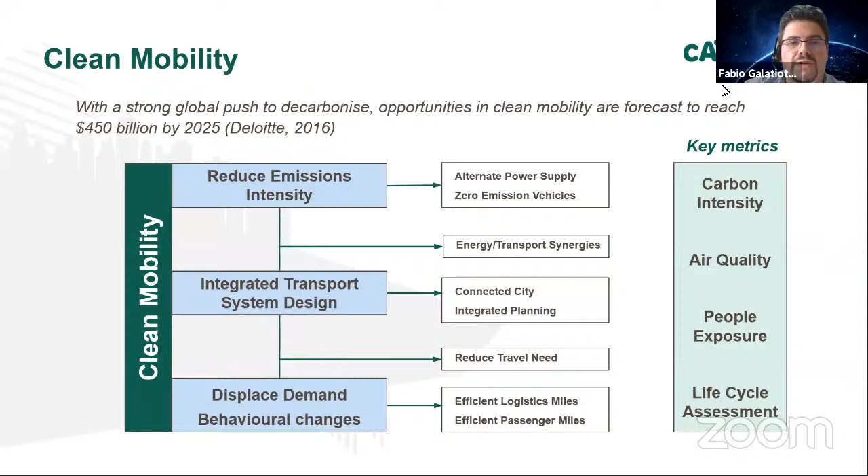Another important element that I want to address is the key metrics. I think all of the actions and strategies we will take in terms of air quality and clean mobility should be assessed by different factors - not just air quality, not just carbon intensity, but also people exposure, well-being, and life cycle assessment, which should play a big role in terms of sustainability, in the short, medium and long term, of all we do around clean mobility and decarbonization.

Just to be a bit more provocative, also thinking about the wider problem and how we can address it in the future. I think one key picture I've seen on the web tells a lot in terms of how we can act today, but also in the future, is how WHO guidelines and EU limits, or the limits we are implementing in air quality today, have some similarity, especially in NO2, but there are several differences in other pollutants.

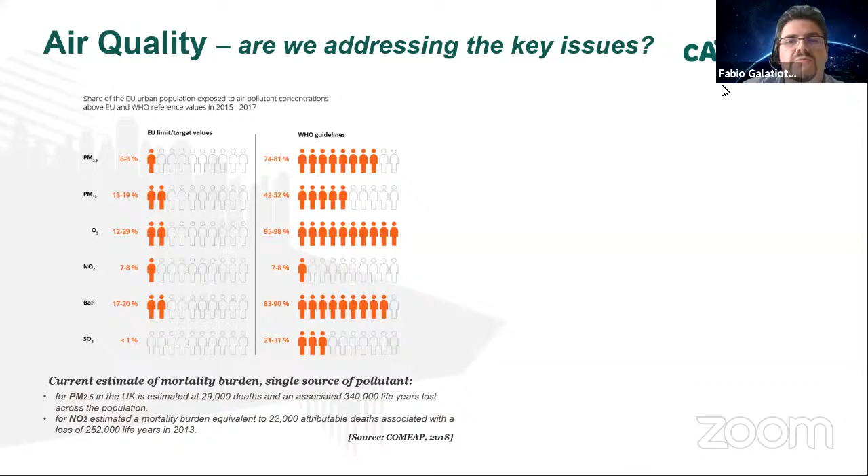In particular, if we look at PM, and assume the WHO guidelines as a reference, we will suddenly see that the UK issue isn't just about nitrogen dioxide and reducing NO2 pollution, which is the majority of air quality management areas today, but PM will also play a big factor. Especially recently in terms of deaths, there has been evidence that poor air quality, especially for PM, is actually driving a higher death rate for COVID and other diseases.

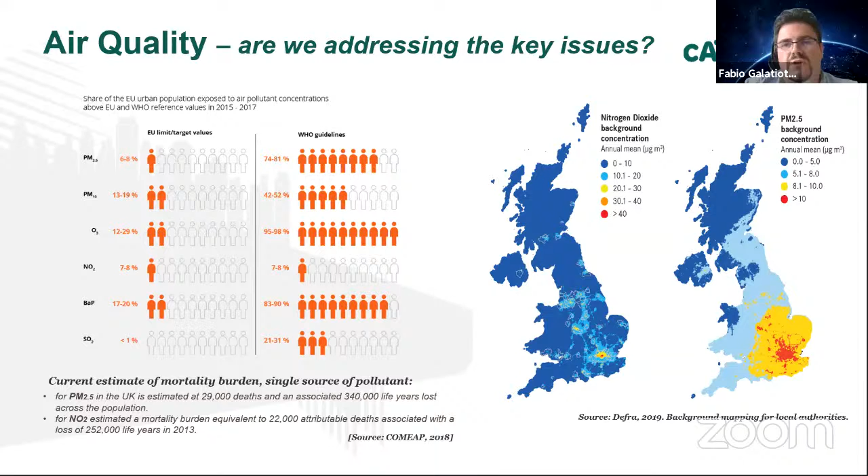At the same time, from the government and the Office for National Statistics, the first GDP result from April was minus 20%. However, that clearly says something to us and poses a few questions. How much transport does our economy actually need to run at a similar level as pre-lockdown? Because if we have 75% less traffic and we are only minus 20% economy, that means we can do a lot of the economy without running all the traffic we had before the lockdown.

So since we are starting to talk about a new normal, I think remote working, online shopping, and local trips will be prevailing, at least in the short term. That could be a good excuse for trying new strategies and policies, but it will also create other problems or shift the problems elsewhere.

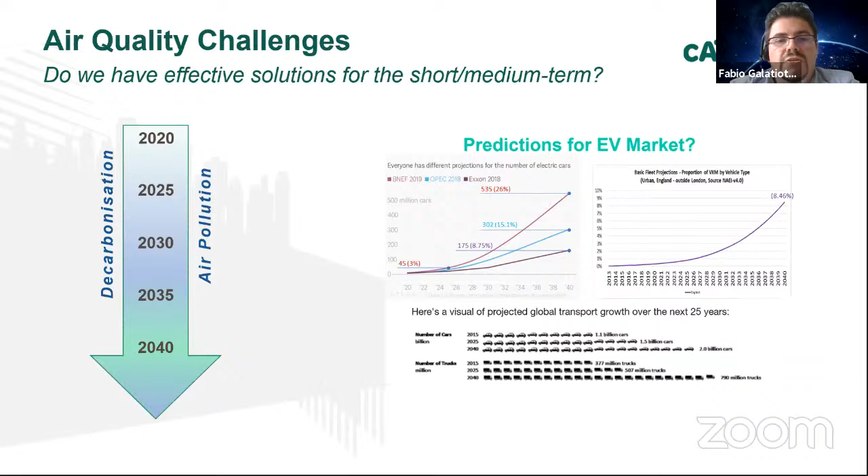But in order to achieve the targets we've all seen from the government, from high level, even the United Nations, the best scenarios tell us we can possibly get up to 26% electric vehicles at best. At the same time, so far we've been told we can grow and have a better economy if we have more vehicles around, more movements, and so on. All predictions say we'll probably get about 40% extra vehicles in the next 20 years, which overall seems not to be the solution, but actually one element of, or one approach to, the solution.

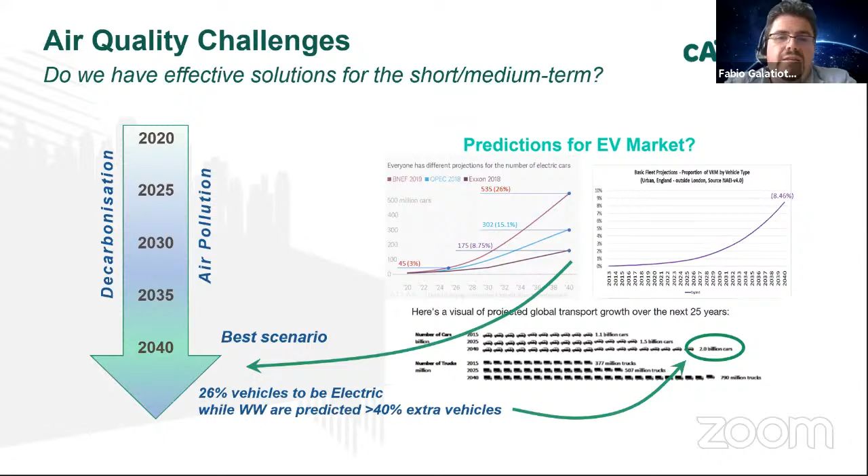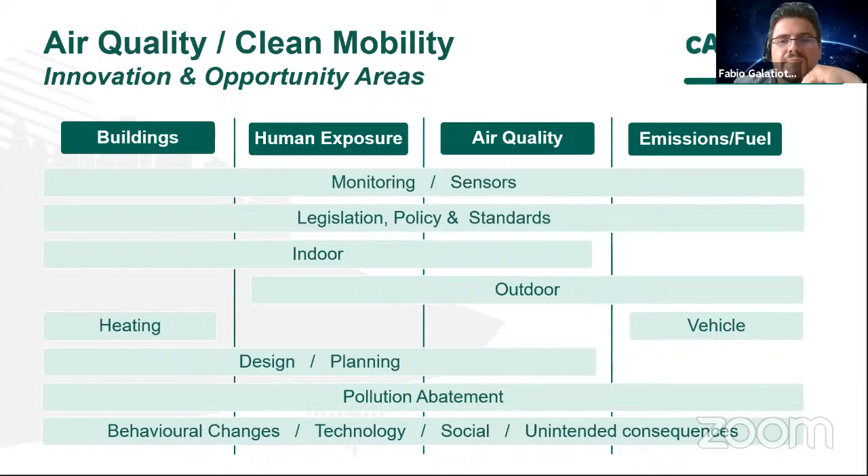So we need to do quite a lot more than just looking at the electric vehicle. I think there are areas that can be cross correlated, or can sometimes work in silos most of the time. But actually our role in the Catapult is to make these all work together. The last thing I want to mention is that indoor and outdoor air quality trade-offs will become more and more important. We spend 90% of our time indoors, and more now than ever after the pandemic. We need to be really careful about indoor air quality and how we treat the quality of the air. That's my presentation, thank you for listening.

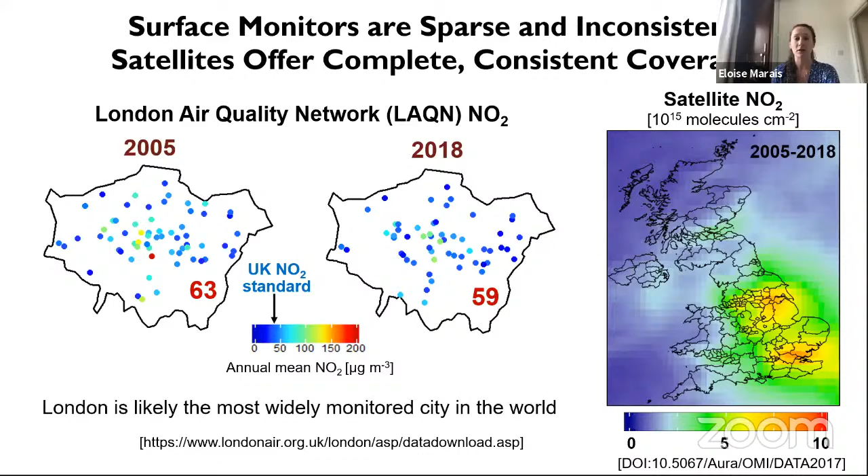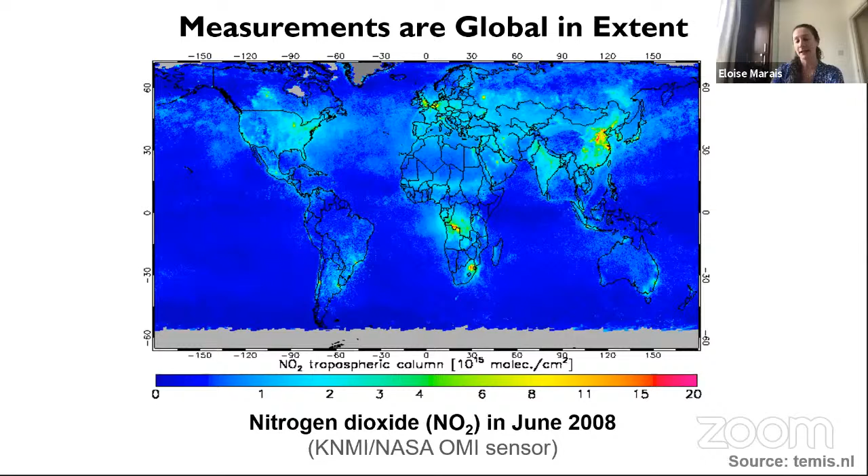The other important thing about satellite observations is that they don't just provide measurements of one pollutant, they provide measurements of multiple pollutants. My intention here is not to take you through a chemistry lesson—this is just to highlight the pollutants that can be seen from space, with these little icons showing satellites.

We can see things like SO2, which for the UK comes from burning coal and other energy-intensive industries. We can see an oxidation product of non-methane volatile organic compounds, which are precursors for the formation of the air pollutants ozone and PM2.5. We have very few to no measurements of NMVOCs, even in the UK, where we have relatively more than other parts of the world. We have measurements of NO2, as I've shown already, and then of ammonia, which is incredibly interesting, not directly regulated, and comes predominantly from agriculture.

And then, of course, we can't see PM2.5 directly, but we can see information that tells us about how PM2.5 is varying in the atmosphere.

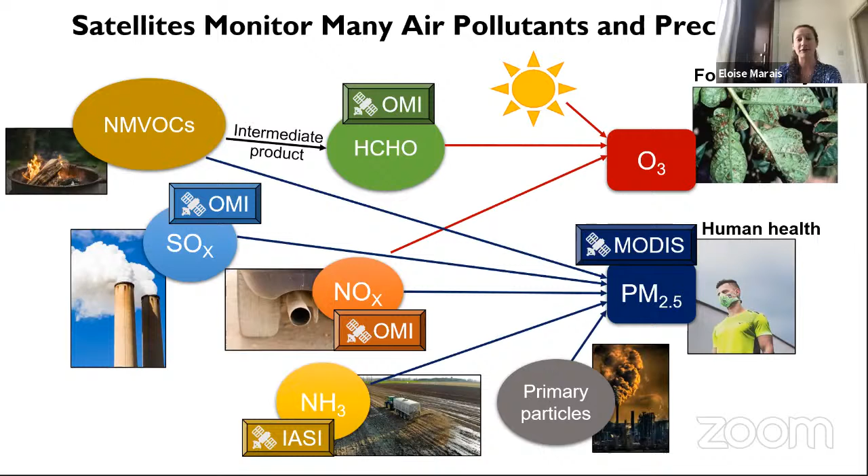Next slide, please. The other important thing about satellite observations is that they have a really long and well-sustained record. There's lots of acronyms here, and I don't mean to burden you with these—these are just the names given to the different instruments in space. I've highlighted the three that I make substantive use of to better understand changes in air pollution in cities: the Ozone Monitoring Instrument, or OMI, the Infrared Atmospheric Sounding Interferometer, IASI, and the Moderate Resolution Imaging Spectroradiometer, or MODIS. They tell us about different things in the atmosphere—OMI tells us about gas phase compounds, as does IASI, and MODIS tells us about PM2.5.

Some of these have been in space for more than 10 years, so you could start to build a historical record about how air pollution has changed in cities, to evaluate how policies have been effective or ineffective at reducing air pollution, as well as looking at how rapid development in cities in the absence of air quality policies leads to substantial and rapid degradation of air quality.

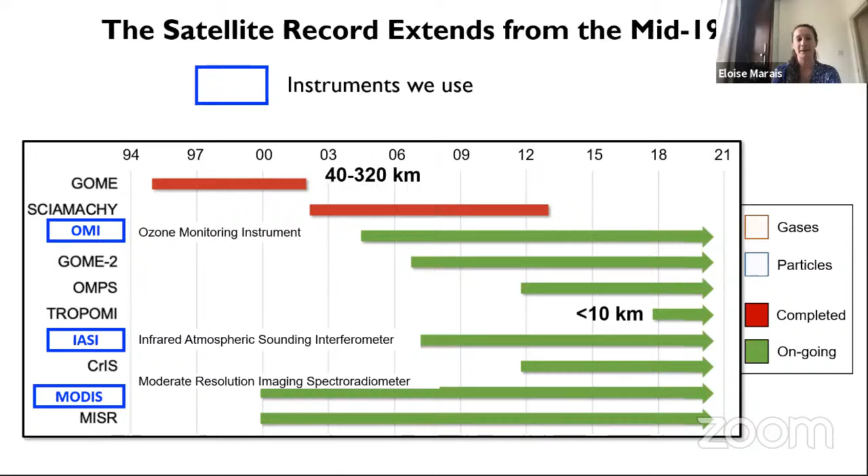Next slide, please. One issue I have to highlight is that these satellite observations are at coarse spatial resolution. This shows visually the extent of a single pixel or data point from these satellite observations relative to the size of London. For something like the OMI instrument, we only get about 4 or 5 pixels in London. For the MODIS instrument, we see a lot more, but it's still at 3 kilometer resolution.

So I'm not advocating for using these to understand postal code levels of air pollution. What I'm advocating for is the ability to use these to monitor citywide concentrations of air pollution every single month of the year for more than a decade, to understand how air pollution has evolved in a city like London.

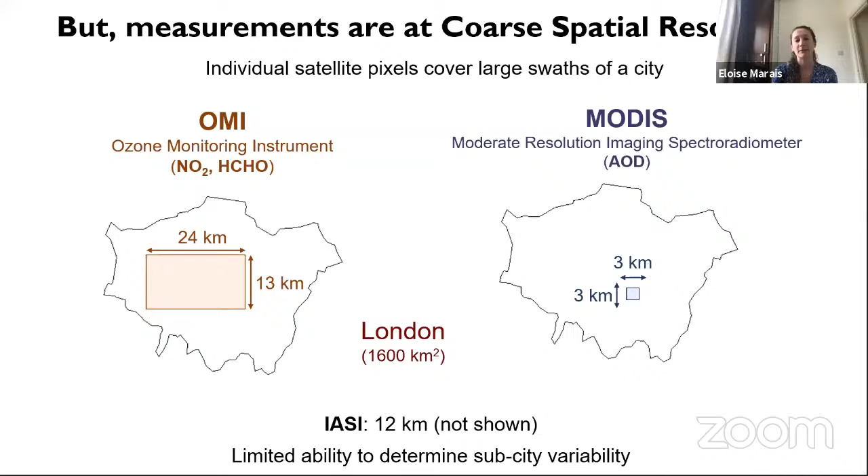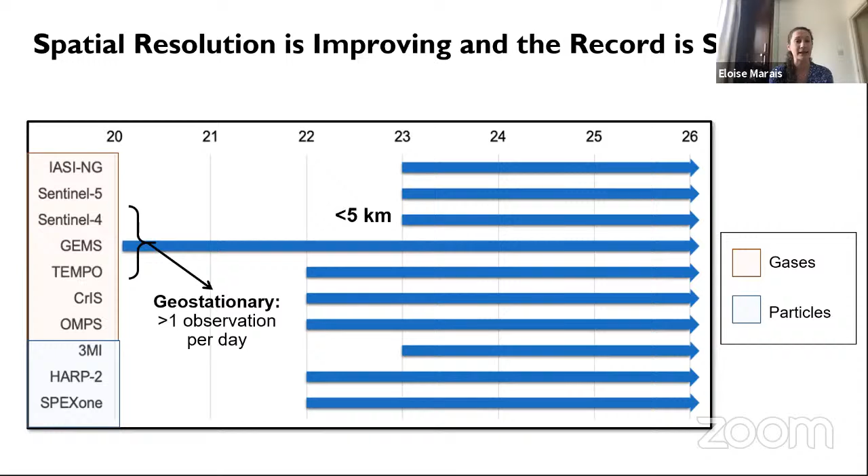Next slide, please. The spatial resolution of these instruments is improving. This shows the time record of the next satellites that are going to be launched into space, demonstrating that the record is also sustained. We're starting to get information down to less than 5 kilometers, even less than 1 kilometer spatial resolution, to extend the utility of satellite observations in understanding the spatial variability of air pollution in cities.

Next slide, please. I've mentioned this already so I won't spend too much time on it, but this is just to highlight how these observations are obtained. The sun is the light source. The instrument gives us spectra across a range of wavelengths, and we then fit these spectra to get concentrations of air pollutants. This does extend to the whole atmosphere, so we get the number of molecules of NO2 throughout the whole atmosphere. But it's important to acknowledge that most of that NO2 is in the polluted layer of the atmosphere, so any variability we see in the satellite observations reflects variability in this polluted layer.

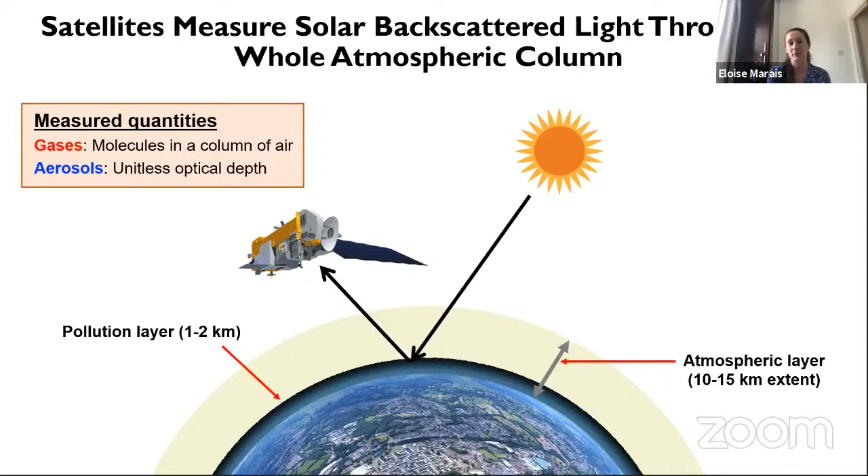So these satellite observations provide us with really effective constraints on changes in air pollution in cities—the kind of air pollution we're concerned about, that we breathe in, or that affects crops and vegetation and other resources and ecosystem services. Next slide, please.

Okay, this has kind of fallen apart—I see the icons collapsed in this one. What this was supposed to show is that, in terms of quality assurance of these satellite observations, we've been able to perform this using surface observations that are available.

The little green boxes you're seeing show a tick mark indicating the quality assurance was approved and passed for NO2, ammonia, and aerosol optical depth or PM2.5, and then NMVOCs or non-methane volatile organic compounds. The icon that stayed behind was the big red cross, showing that SO2 didn't pass.

Unfortunately, SO2 has very poor detection, so you can only really see SO2 sources that are really large - a few years ago, power plants in China and very intense volcanic emissions. But we can't see SO2 in cities in the UK. Next slide, please.

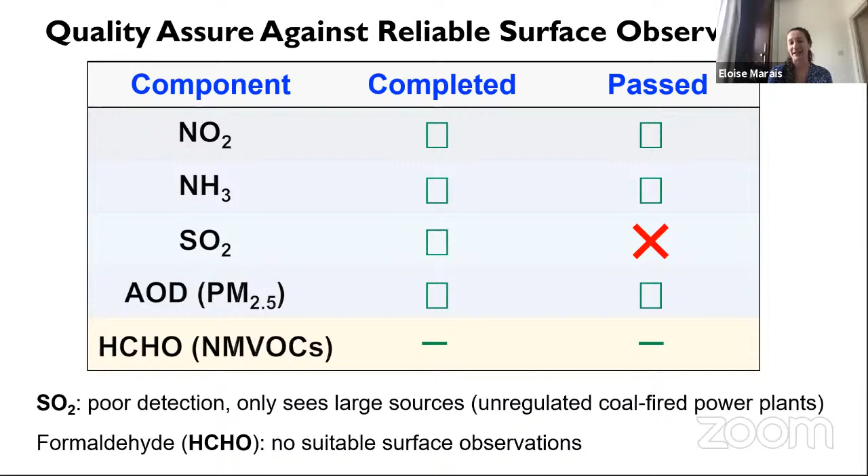What we find for NO2 is that the change has been about 2.5% per year in both London and Birmingham, demonstrating that the policies being implemented are effective. But if we apply this 2.5% per year decline to a very polluted site like Marylebone, it means it would probably take about 30 to 40 years for that site to achieve compliance at these current rates.

For air pollution in Delhi and Kanpur, both cities are developing rapidly. There are supposed to be air quality policies in Delhi, but using the satellite observations, we're not seeing that these are effective at reducing pollution levels. We're seeing the opposite in these cities - for PM2.5, it's an increase of 2.5% per year for Delhi, 3.1% per year for Kanpur.

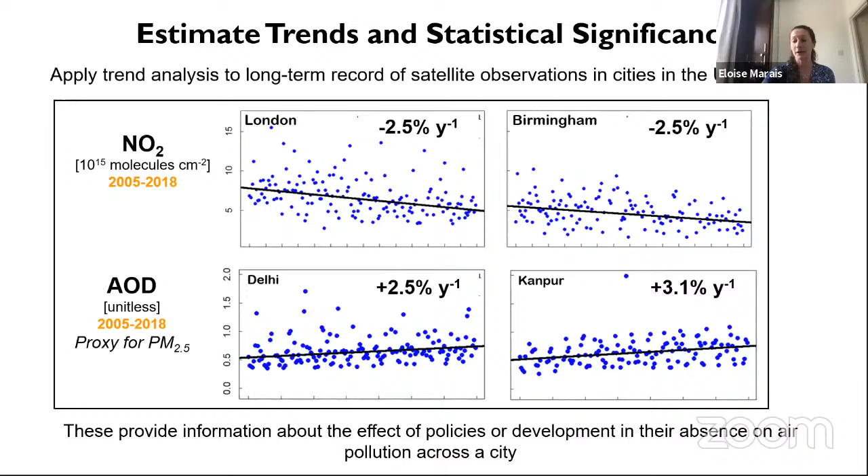Next slide, please. This summarizes the results, which show that for London and Birmingham, air quality policies are effective and pollution is decreasing. For Delhi and Kanpur, the opposite is the case. With the exception of ammonia - in all cases we don't have any direct controls on ammonia, so there's no significant change in concentrations, indicating we need to develop policies targeting agricultural sources of ammonia to address high concentrations and the lack of significant change, where ammonia substantially contributes to PM2.5 concentrations in the UK. Next slide, please.

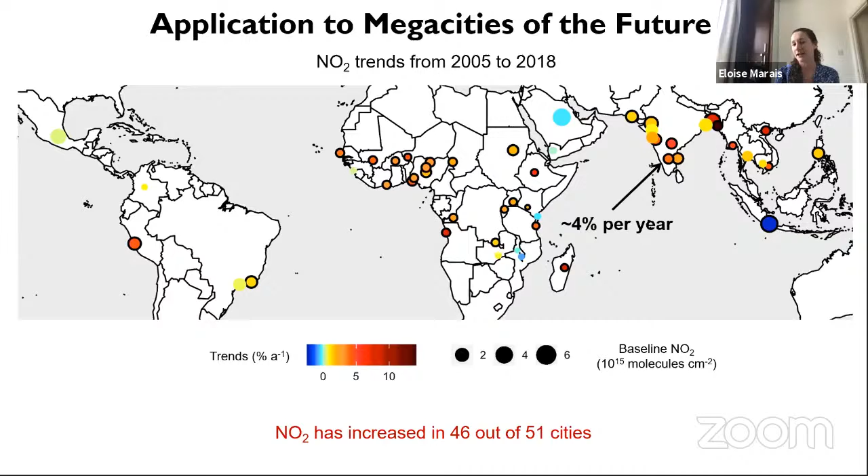I think I'm about to wrap up - do you mind skipping 4 slides ahead? I should probably wrap up at this stage. We've done additional analysis looking at tropical megacities, applying these satellite observations to locations of the world that are going to experience rapid development. Those are the slides I would have shown, but they'll be available, and you're welcome to email me with any questions. Just to acknowledge that in my research group, the person doing the data analysis is Kern, and this work has been submitted for peer review.

I'm happy to take any questions at the end of the presentation series. Thank you very much for your time.

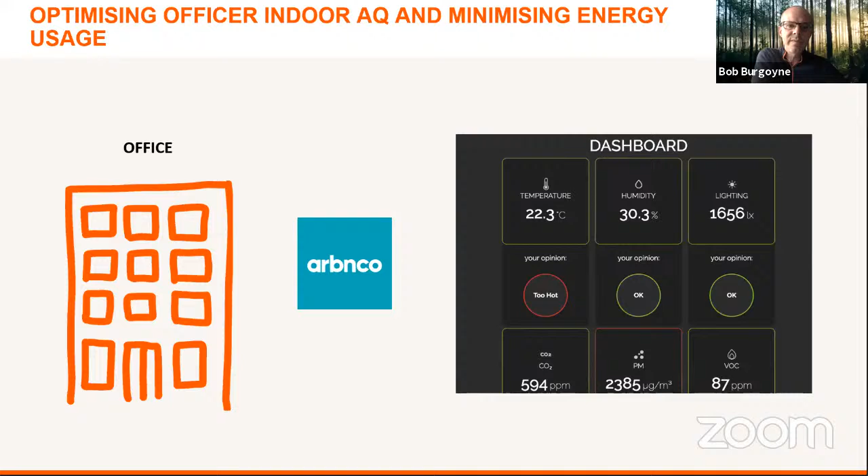So on a similar note, we're also working with a company called arbnco, who provide indoor air quality monitoring and optimization solutions for offices. They fit out offices with a range of sensors and a control system which is used by facilities management to help address issues of air quality indoors. Next slide, please.

So don't have time to discuss in detail all of the other interventions we're supporting, but briefly, they're around demonstrating and getting buy-in for alternatives to petrol or diesel vehicles. A couple of companies are also providing interesting solutions that break down pollutants into harmless components through photocatalytic reactions - one using fans, and the other using paint catalyzed by sunlight. If anyone is interested to hear more about any of the SMEs we're supporting, drop me a line, I'm happy to connect afterwards.

So what next? That was a whirlwind tour of the project. Next steps are to launch the UK-India Green Business Portfolio - a showcase of all the companies we're working with - and of course launch the testbed itself to get the solutions up and running. The longer term goal is to support the SMEs on the project in scaling and driving adoption of their solutions. The testbeds will provide user and technical testing to help them improve their solutions, and we'll be generating good publicity through the program to help them market and sell their solutions. We're also already finding some nice connections and collaboration opportunities, both between academics and startups and other companies, between the UK and India. So that's a summary of the IFCA program. Thanks for your time, and happy to take questions at the end.

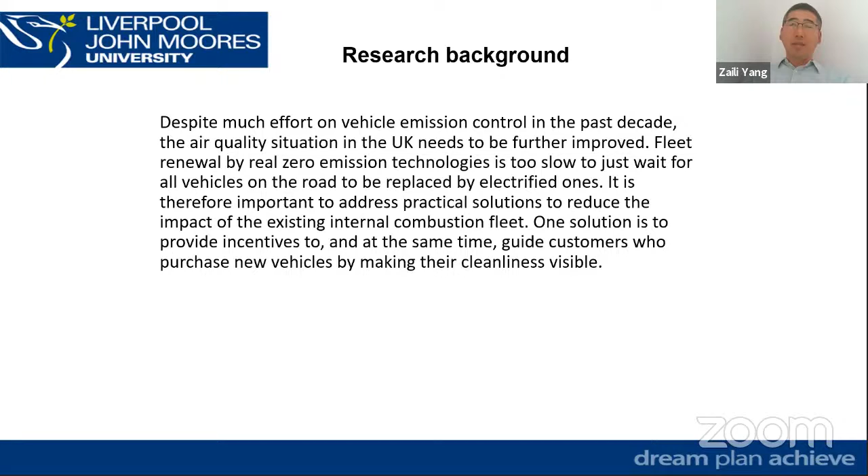Next slide please. The whole project is really to see how clean a vehicle is. As Fabio already mentioned, apart from waiting for electrified vehicles to replace the existing fleet, there are other complementary solutions, such as using incentives to get customers to buy cleaner vehicles. This project mainly aims to develop a single value indicator to tell clients and customers which vehicle is cleaner than others.

Next slide please. When we talk about the aim, it's motivated by similar indices from other sectors, such as Euro NCAP, and energy labels from kitchen appliances. In the current literature search, we find there are some sources indicating different levels of emissions and pollutants from different types of vehicles, but we haven't found any framework able to combine all different emissions and pollutants from vehicles to form a single value that clearly indicates a car's pollution level.

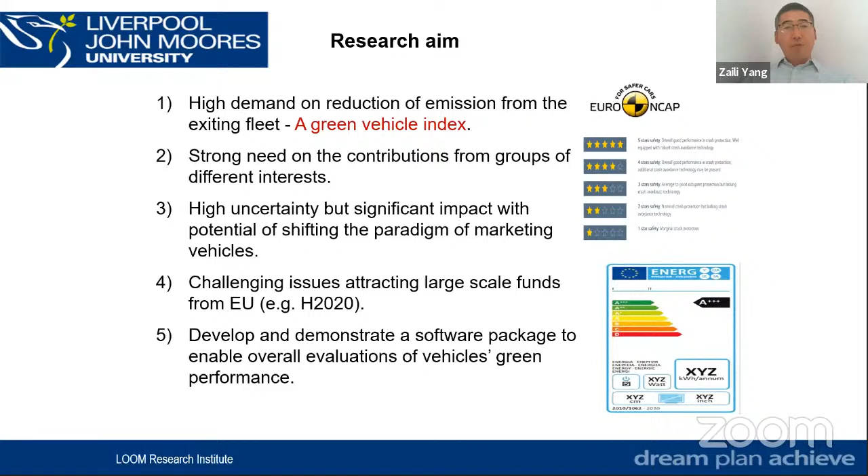Sorry, can we go back to slides here - forward one. On top of that, we also noticed that in order to guide buyers' choice, we need to take into account other factors from social science perspectives, such as the vehicle's performance, the cost, and also other incentives from the government.

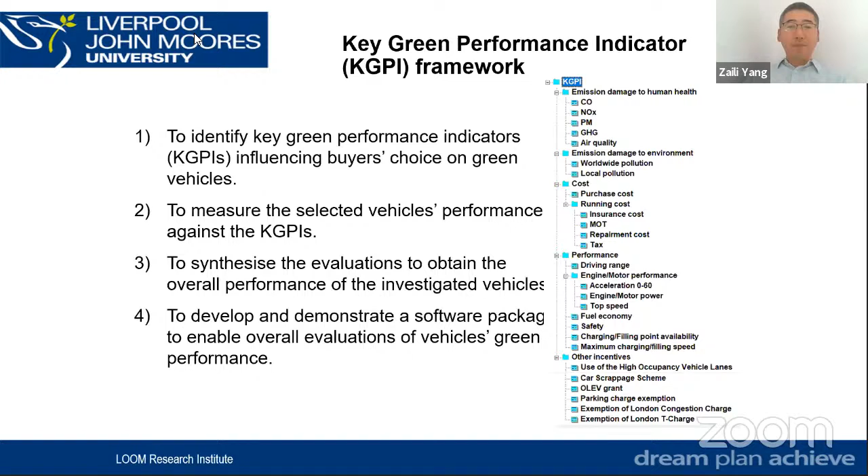In order to do that, first we need to see to which extent our stakeholder groups think about the importance of different indicators. So we carried out a wide range of surveys to allocate different weights for different indicators. We received massive support from CPC colleagues like Fabio, Nick Ward, and Burgoyne - big thanks to them.

Next slide, please. So after the survey, we found out the result, which is in fact very interesting to ourselves as well. One of the aims is to see the different perspectives from different groups of stakeholders. For instance, when we look at vehicle cleanliness or incentives from government perspectives, will our government policymakers really understand the demand from the buyers? The result tells us it may not be that consistent.

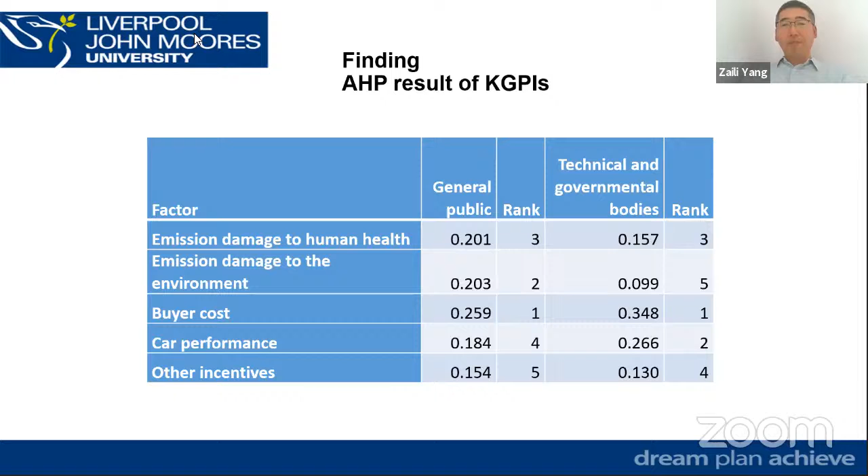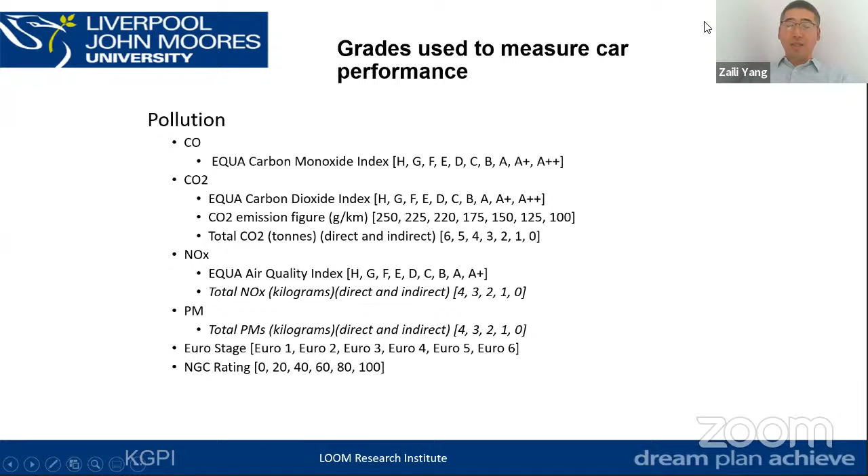Next slide, please. We have selected 6 vehicles as the first group of test vehicles for demonstrating the KGPI framework, and their values against each indicator had been provided and collected.

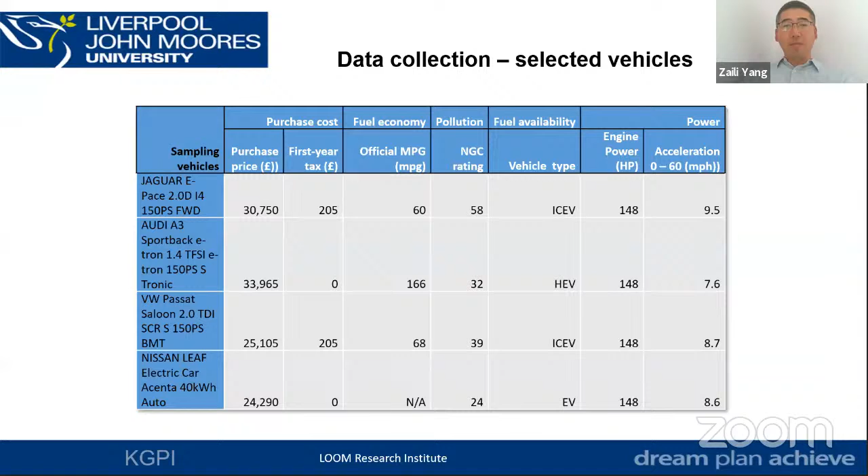Next slide, please. Through a new advanced technique called evidential reasoning, and a software called Intelligent Decision System software, we have developed a new prototype EV evaluation tool. From the slides, we can see from the general public or buyer's perspective which vehicle is the best in terms of greenness or cleanliness. Obviously, from our first group of testing, the Nissan Leaf is the most clean vehicle among the 6 selected cars.

Some of you may notice that apart from the red color, for some vehicles on top there are some gray areas. Those colors indicate incomplete data. One reason why we selected evidential reasoning as the supporting technique is that this software and method allow us to accommodate some subjective elements and uncertainty in data. So although we don't have accurate input data, we're still able to use this method and software to tackle the uncertainty and provide the ranking.

At the right-hand side corner is the ranking from the government and technical perspective. Because they selected small samples, the results are rather consistent.

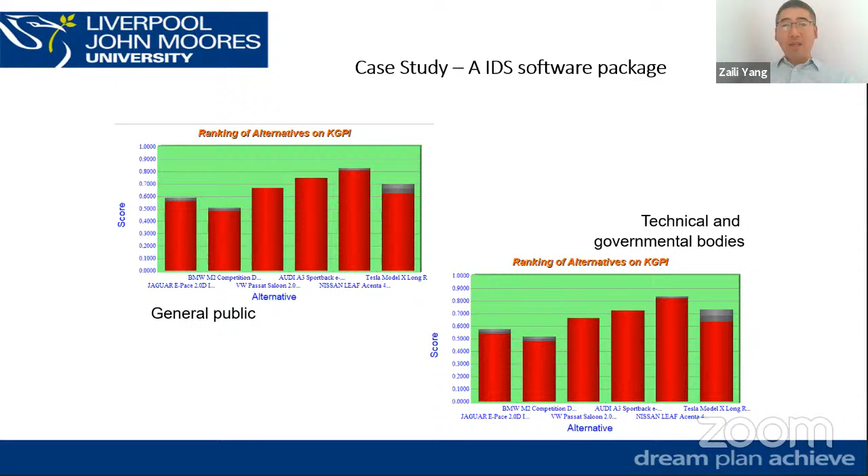When we go back to do the sensitivity analysis, we find out the most influential factor contributing to such a difference is the incentives, because in London areas we know there's a lot of incentives and also negative ones, like penalties, the congestion charge, and so on.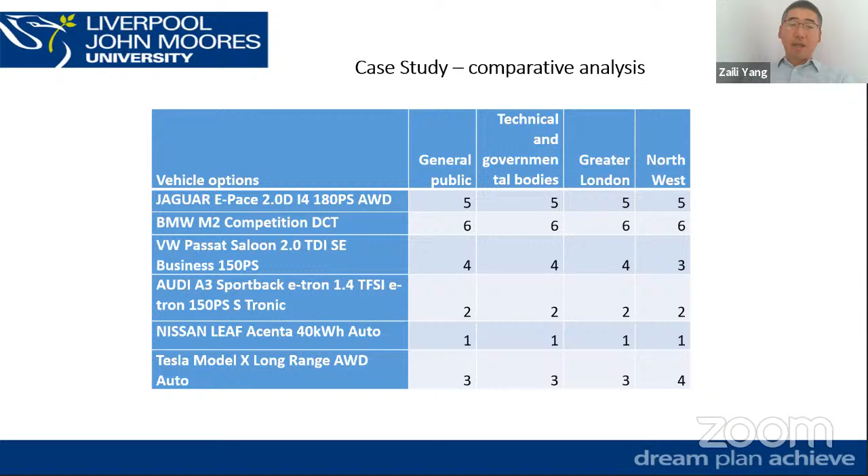So the Tesla Model X is better than the VW Passat.

Next slide, please. There are various different directions we can further investigate based on the current findings. One of the major things we are preparing currently is the vehicle data collected for the first group of testing vehicles. The data largely refers to manufacturing specifications from manufacturers. As we know, with time vehicles' performance degrades, and different drivers' behavior will also contribute to different levels of emissions.

So this slide shows a result from another project. We have developed portable equipment that can attach to the vehicle to detect emissions directly, along with associated software to model driver behavior and show how it contributes to different levels of emissions. In future, we can incorporate more dynamic data into this evaluation software so that we will know, for example, vehicle A at age 5, driven in off-peak time by a very aggressive driver, what the emission levels or cleanliness would be. That will provide more dynamic insights into the emission contribution from particular vehicles to air quality.

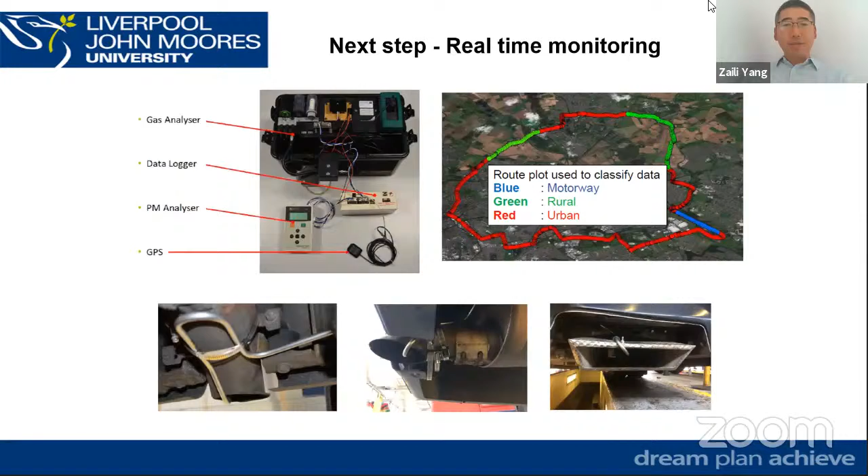Next slide, please. This last slide is about future research and possible impact. As mentioned several times, the main impact we're looking at is how to reduce emissions from the existing combustion engine fleet in the next 20 years before 2040.

We would also like, if possible, to collaborate with transport authorities to see whether we can create a green label to replace the current schemes, which mainly focus on CO2. We know road tax is based on CO2 levels, but as we've seen across three presentations already, there are far more pollutants than just CO2 from vehicles.

So if we can verify the rationale of this single value index, that can help increase public awareness and provide scientific suggestions for transport authorities to make more rational policies. Eventually we hope this will improve the well-being and health of city residents and make the city greener and more sustainable.

We are currently receiving two more EU projects. One is from the European Research Council, £2 million, to support a project very relevant to this one, and it can certainly supplement what we are planning in the last slide I presented.

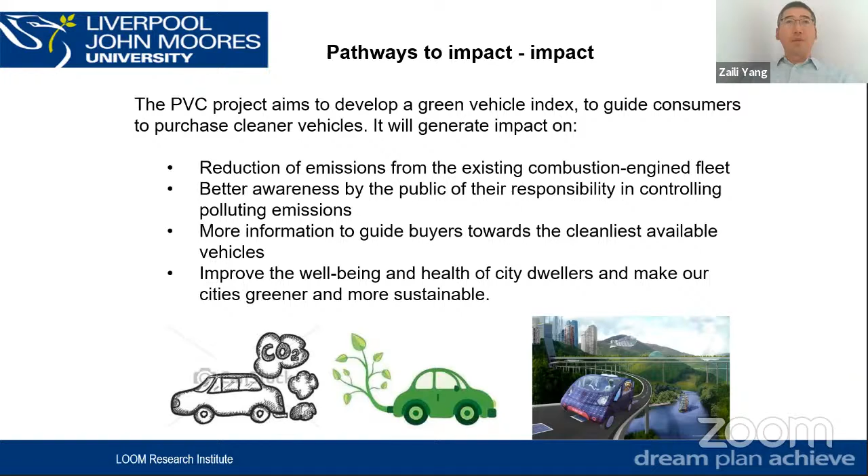That's basically all from me. The last slide has my email, so any questions will be very welcome.